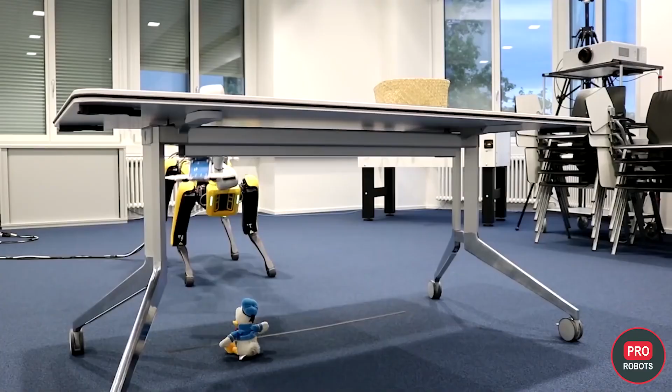The news of Elon Musk's companies, the mass equipping of robotic dogs with robot arms, sense of touch for robots, robot fish, and other high-tech news in this one video.

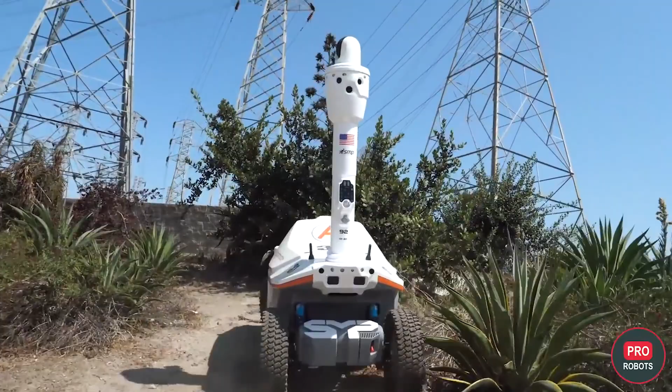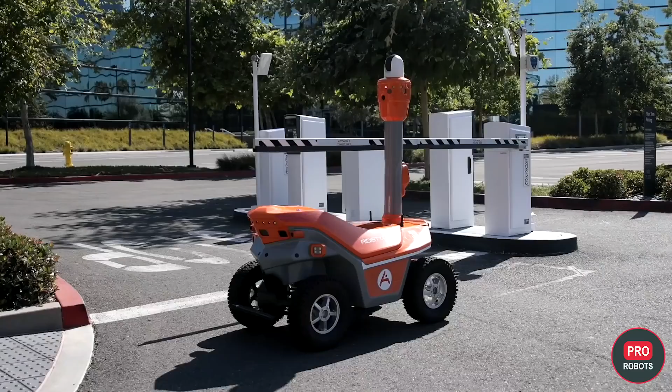A comparison test of Tesla and Waymo autopilot has surfaced online, reports the website drone.com. The author of the Whole Mars Catalog channel first called a Waymo unmanned cab and then drove his Tesla Model 3 with the FSD Beta autopilot along the same route.

Interestingly enough, Waymo took a different route than the Tesla and drove more cautiously. As a result, Waymo's robotaxi took 8 minutes to drive, while the Tesla Model 3 took only 5 minutes and 12 seconds. Tesla Autopilot can be used on any roads in any city or country, but only under the control of a real driver.

Conversely, Waymo robotaxis so far work only in limited areas but with an empty driver's seat. In the video of the experiment, you can see that Waymo robotaxi, unlike the Tesla, avoids more dangerous left turns at unregulated intersections. That's why the car took a longer but safer route for its trip. In the end, both cars handled the route well, visualized the environment around them perfectly, and moved smoothly without sudden accelerations or brakes. Also, neither vehicle's autopilot systems violated traffic rules and both responded to traffic signs effectively.

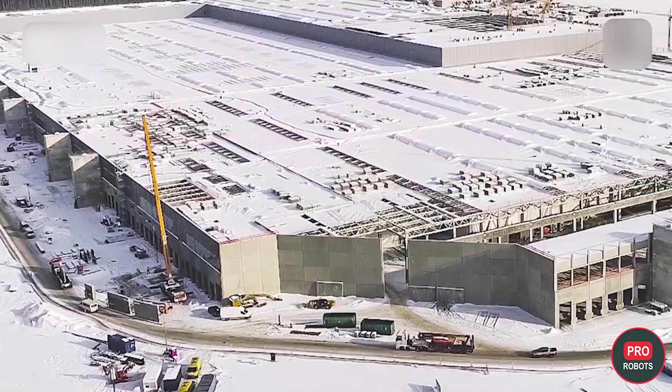Tesla is building an energy storage system of at least 100 megawatts in Texas. This is Elon Musk's way of dealing with sudden power outages, one of which happened last month because of unprecedented snowfalls. Tesla has not yet publicized this project, but it will be conducted under the cover of a little-known division called Gambit Energy Storage LLC. The autonomous station will include 20 large battery packs with lithium iron phosphate batteries that will last between 10 and 20 years.

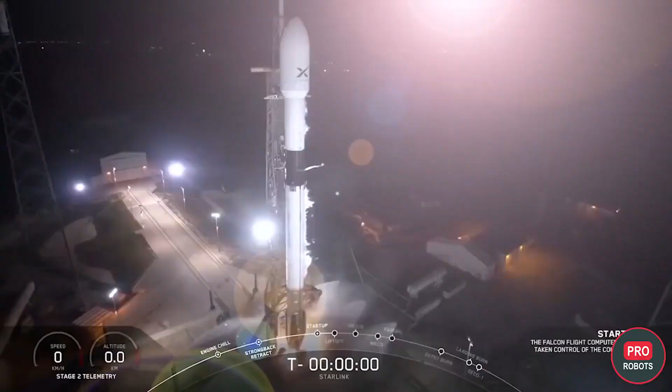SpaceX has planned to connect airliners and cargo vehicles to Starlink. A corresponding application was filed with the U.S. Federal Communications Commission. The document states that SpaceX is requesting a comprehensive license to operate Starlink terminals on so-called mobile ground stations, which include cars, trucks, ships, and aircraft. Personal cars will have to wait for now, as the company's terminals are too big for them. Today, Starlink has more than 1,200 satellites and about 30,000 users.

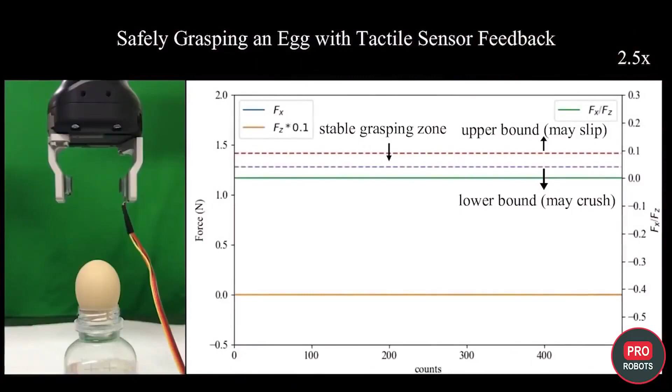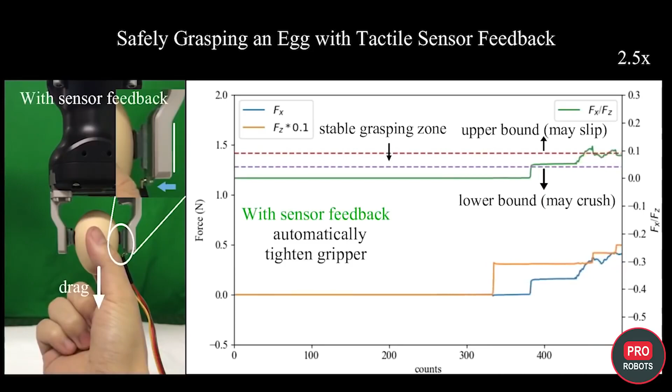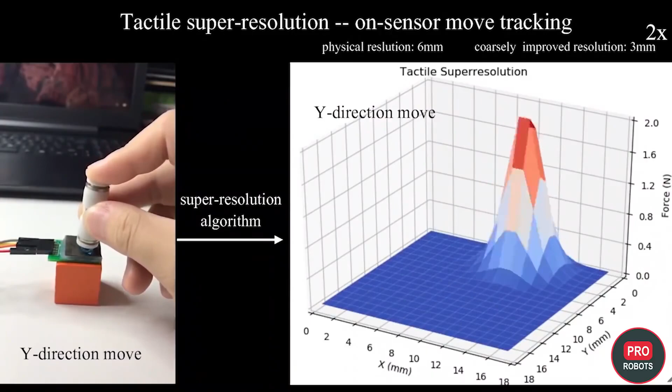A team of developers from China and the United States has developed magnetic finger pads for robots. It is no secret that the sense of touch is what allows us to interact with objects so well, and it's this same sense of touch that's so difficult to give to robots. In this study, the role of sensitive fingertips is played by a thin, flexible magnetic film. Touch and pressure cause it to deform, and sensors located deeper within it record the resulting changes in the magnetic field. A neural network is used to analyze the signals from the sensors.

It can determine not only the place and force of contact, but also feel the texture of the surface.

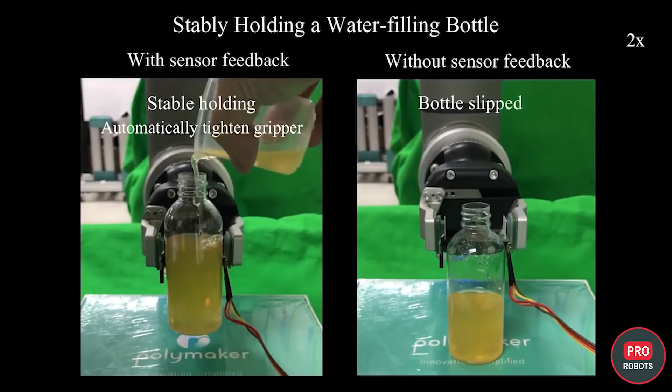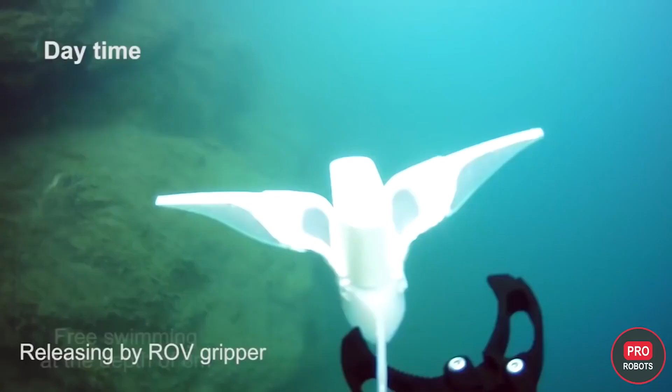Small circuit boards are connected by flexible wires and sealed in silicone. Just like a fish, this robot moves by movement of fins made of an elastomer, which shrink when exposed to an electric current. Engineers tested the robot in three conditions: in a lake at a depth of around 70 to 80 meters, in the South China Sea at depths of 3,224 meters, and at the bottom of the Mariana Trench at a depth of 10,900 meters.

Although in the latter case, we can see that the robot actuators worked with a smaller amplitude, the device still retained its operability in extreme conditions.

Insects know how to navigate in a world with dynamic obstacles, wind gusts, and general uncertainty. MIT research team led by Kevin Yufeng Chen decided to endow flying robots with such qualities and developed a new generation of tiny and agile drones that look, act, and maneuver like real insects. The 0.6-gram device can maintain balance with external action, perform somersaults, and other complex maneuvers.

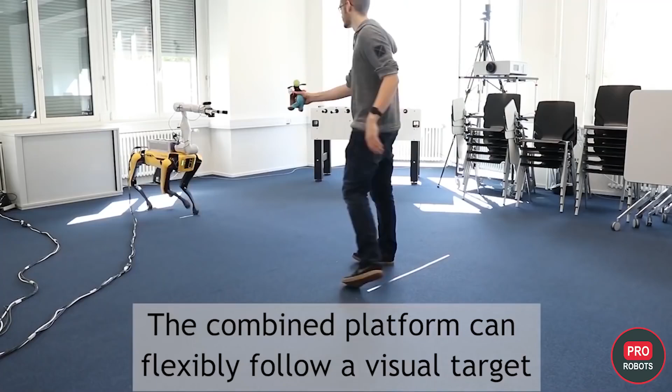Engineers at the Zurich University of Technology decided that it's not necessary to buy a robotic arm for Spot from Boston Dynamics. It would be much more interesting to make it yourself, based on any available manipulator. A robot with a robot arm can track objects and manipulate them with ease.

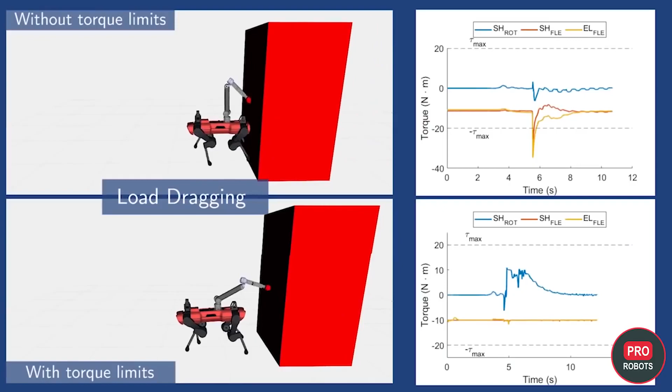Robotic Systems Lab also decided to keep up with Boston Dynamics and created a robotic arm for its four-legged robot, ANYmal. Engineers developed a full-body motion planning structure that combines dynamic movement with manipulation tasks. As a result, any task involving the manipulation of external objects can be solved on the robot's onboard computer in real time as part of a control scheme with model prediction.

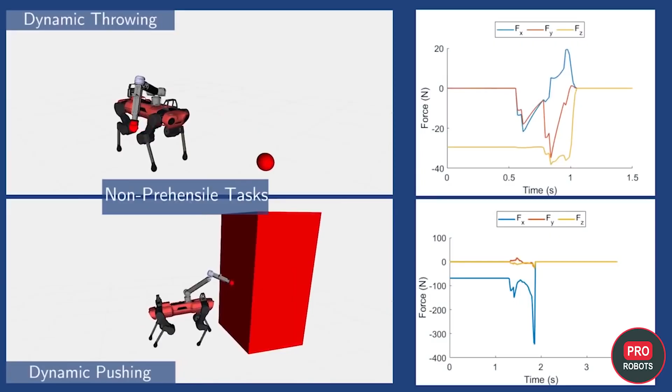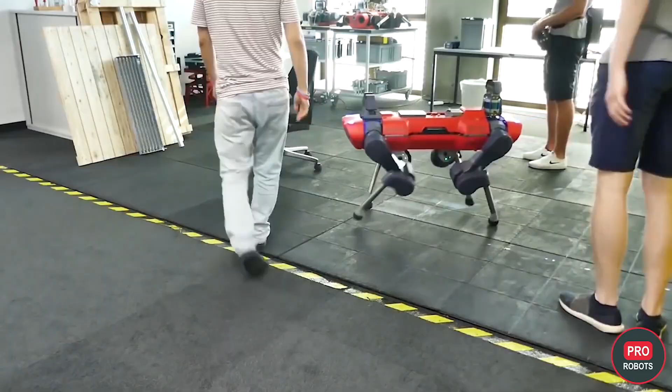A new demo showed how the ANYmal robot can avoid dynamic obstacles and navigate autonomously in a challenging space. With high-level navigation commands, the robot can safely navigate to a target location based on depth camera data and reinforcement learning. The data, which includes images from the camera and its trajectory, is combined by the system and used to simulate environmental states.

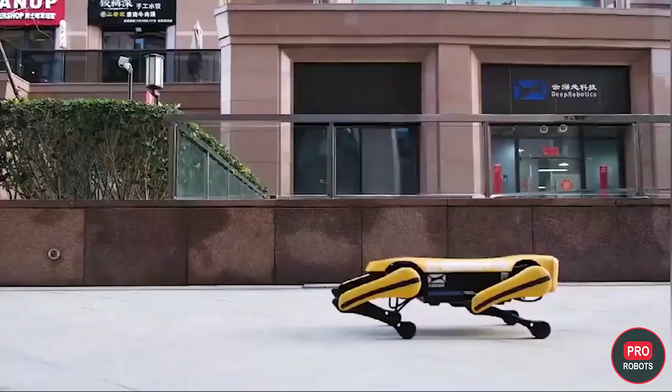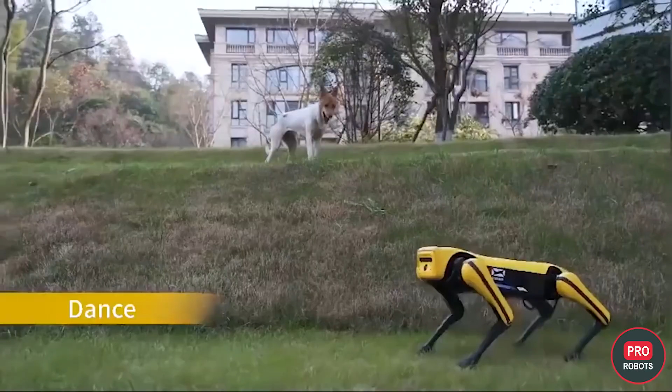Deep Robotics has published a new video of its Jueying Mini Lite robot. The robot does somersaults, possibly knowing how to avoid obstacles and follow a human. It's possible, because the company does not comment on the video and there could be a human operator behind the scenes. In any case, the robot looks nimble and agile. It also looks a lot like the robot Spot.

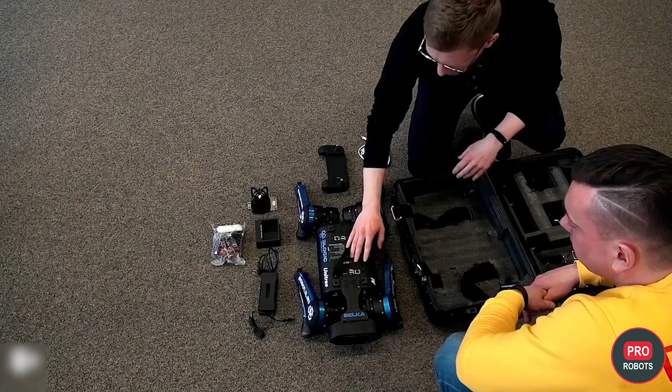Robotic Systems Lab also showed its strongest robot ever in action, the Menzi Muck M545. This unmanned, semi-autonomous walking excavator assisted first responders in a simulated car crash with an explosion.

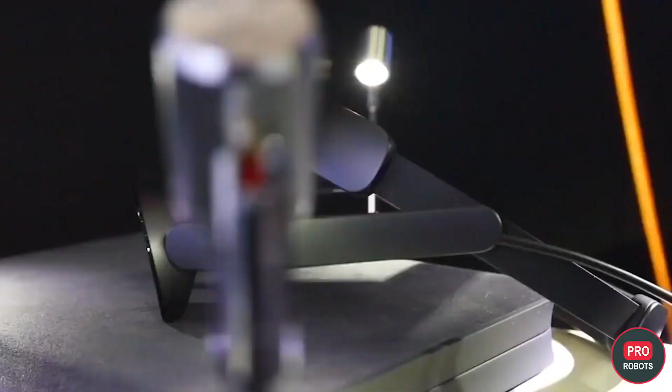At last week's MWC Shanghai 2021, which focused on next-gen technology, Huawei said it has built more than half of the 140 commercial 5G networks currently deployed in 59 countries. And despite bans on its network equipment in many countries, it should be noted that most of the directors of the major technology companies who spoke at the event noted that the implementation of 5G networks in the coming years will determine the speed of technology development in all countries around the world.

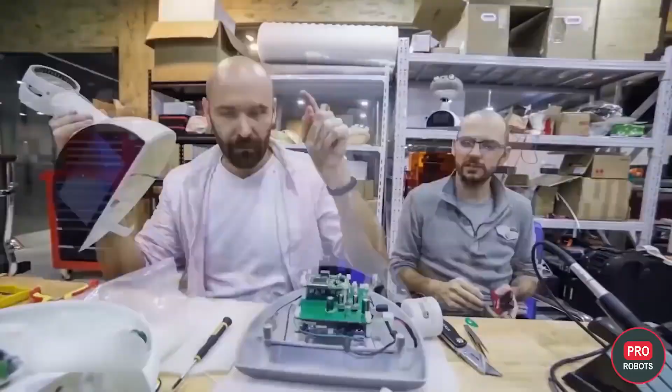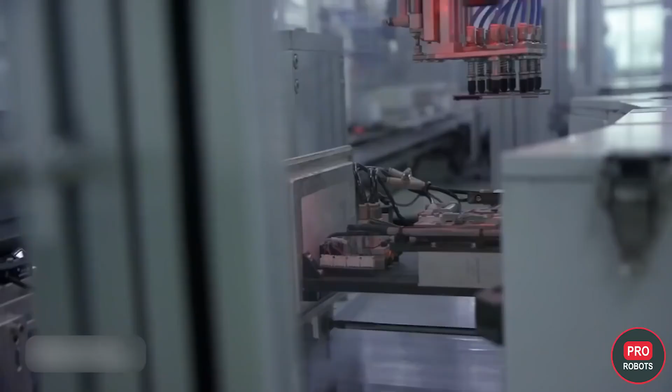Recently in China, deputies approved an ambitious plan for a technology breakthrough. According to the new plan, by 2035, the country must make significant breakthroughs in technology, from artificial intelligence to quantum computers and biotechnology. To do this, spending on basic research will increase by more than 7% every year for five years. This will help reduce the country's dependence on foreign technology markets, particularly the US market.